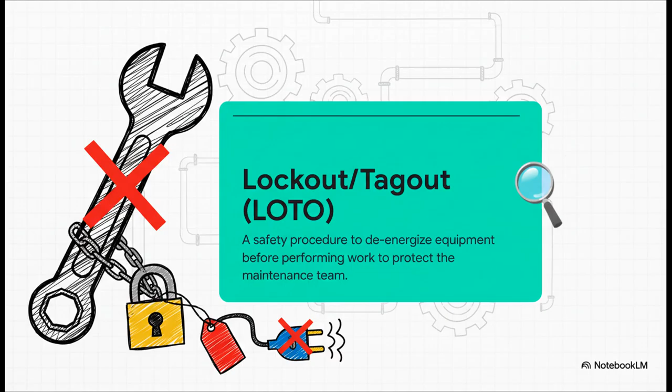Okay, first up, let's explore what you could call the plant's heart and its circulatory system. I'm talking about the electrical and mechanical gear that provides the power and the pulse for the entire operation. Before a single tool even gets picked up, safety is everything, period. This procedure right here, Lockout/Tagout, or LOTO for short, is completely non-negotiable. It's a physical lock that makes absolutely sure a machine has zero chance of turning on while someone is working on it. It's such a simple step, but it saves lives, and it is always step one.

Now, get this. Here's a fact that sounds totally backwards. The #1 reason for bearing failure isn't too little lubrication, it's actually too much. That's right. If you pump in too much grease, you can blow out the seals and cause a ton of damage. It's a perfect example of how this kind of maintenance is a game of precision, more like surgery than just hammering on things.

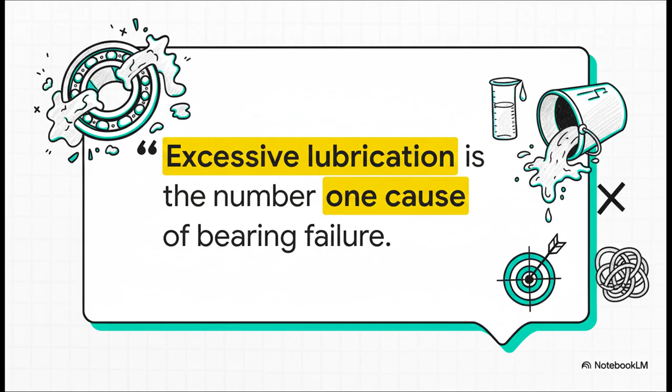Think of these checks as a regular physical for the plant's heart. You're making sure it can breathe by keeping the vents clear so it doesn't overheat. You're checking its posture, making sure the alignment and belt tension are just right to reduce stress. And just like a doctor with a stethoscope, you're listening for any weird noises and watching that amp draw because those are the very first signs that something might be going wrong.

So, those motors we just talked about, they're powering the real workhorses of the plant, the pumps. These things are moving unbelievable amounts of liquid, 24/7, with no breaks. So how on earth do you keep them from failing? Well, more often than not, the answer comes down to one tiny little component, the seal.

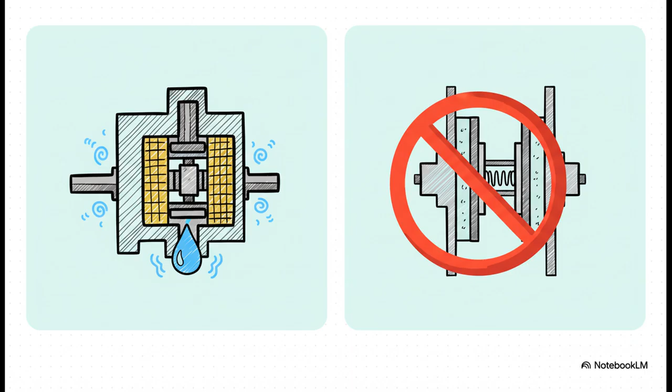All right, so you've got two main kinds of pump seals, and this is where it gets pretty interesting, because they have completely opposite rules. On the left, you've got the stuffing box, which is actually designed to leak. That little drip is critical for keeping it cool. But the mechanical seal on the right, totally different story. It should be bone dry. If you see a single drop, you know that seal has already failed. You absolutely have to know which one you're looking at.

So for those stuffing boxes, what's the magic number? Well, there it is, 1 to 2 drips per second. Any slower, and that pump is going to overheat. Any faster, and you're just wasting water and wearing things out. It's such a tiny detail, but getting it right has a huge impact on keeping that pump running for years and years.

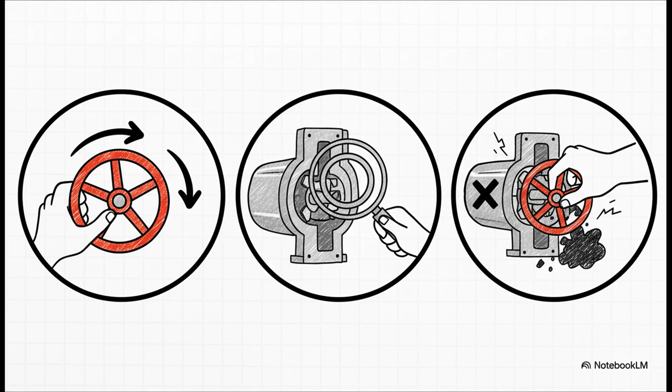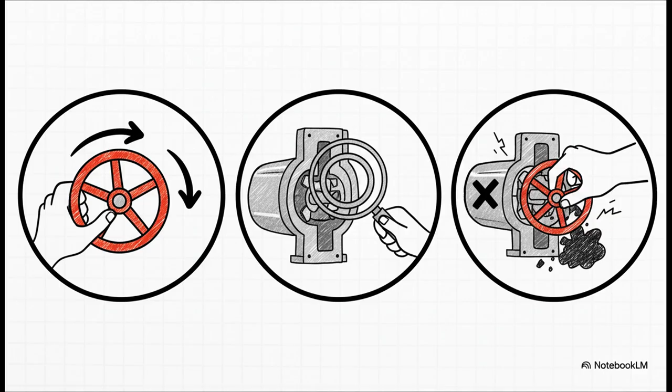And hey, it's not all about the seals. There are other simple habits that can prevent massive headaches later on. For instance, exercising a valve, which just means opening and closing it every so often, stops it from seizing up. And if a pump sits idle for too long, the sludge inside can literally harden like concrete. A simple hand turn of the impeller every now and then prevents a super costly and difficult repair down the road.

Okay, we've moved the water, now it's time to actually treat it. This brings us to what you could call the plant's pharmacy, its chemical systems. And in here, precision is absolutely everything, both for the treatment to work right and for the safety of the crew.

When you're working with these kinds of chemicals, your absolute last line of defense is the emergency shower and eyewash station. And as you can see from this checklist, it has to be tested every single week, without fail. The water can't be freezing, it can't be scalding, it has to be just right, otherwise you risk making a bad situation worse. And look at that last one, it must be able to run for a full 15 minutes. We're about to see why that number is so critical.

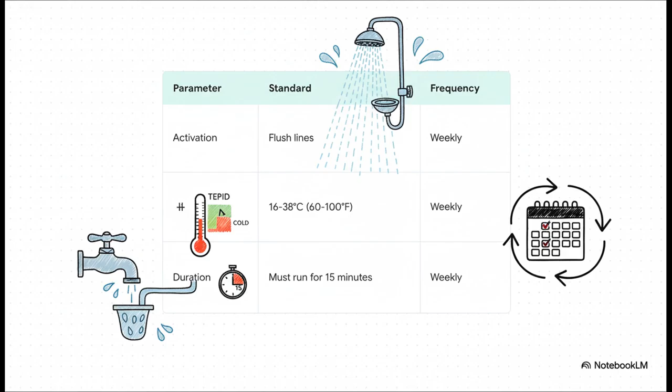Let's just focus on this number for a second, 15. Why 15 minutes? Because that's the minimum time medical experts say you need to properly flush dangerous chemicals out of your eyes. Anything less than that, and you're gambling with someone's eyesight. A station that can't hold up for 15 minutes isn't just a broken piece of equipment, it's a complete failure of the safety net.

So, that was the emergency stuff, but proactive safety is also about daily habits. This is super simple, but absolutely critical. The moment a chemical transfer is done, the line gets flushed with water. Right away. This immediate little step prevents crystals from forming, which can clog up the lines and bring the whole system to a grinding halt.

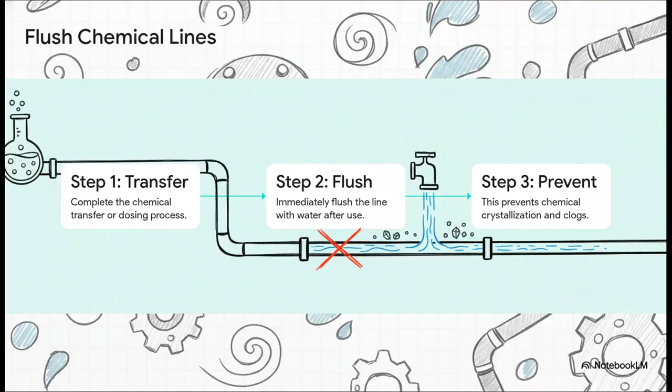You know, when you boil it all down, maintaining the chemical systems really comes down to these two habits. On one side, you're constantly calibrating for accuracy. On the other, you have a zero-tolerance policy for leaks. I mean zero. Because even a tiny, harmless-looking drip can literally eat through concrete and steel over time, creating a massive hazard.

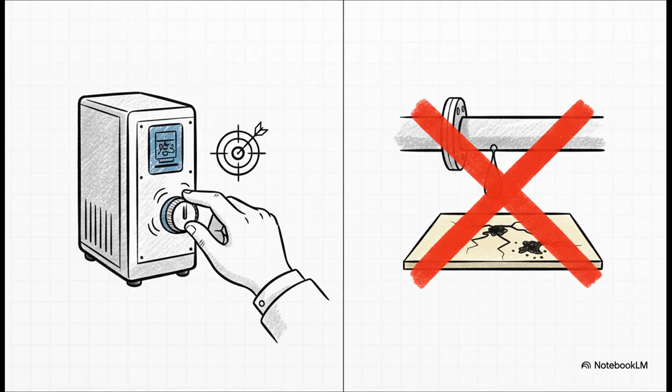Now let's move to the biological core of the plant. You could think of these as the living engines that do the real heavy lifting of the treatment. We're talking about the aeration and digestion systems, and they need just the right environment and fuel to do their job.

So in the aeration tanks, the whole goal is to get oxygen to the helpful bacteria. Seriously, just picture a giant aquarium, but for an entire city. That means keeping the air filters clean, just like on your vacuum cleaner. It also means doing something called an air bump, where you blast high-pressure air through the system to shake off all the gunk that builds up. It's all about making sure the good bacteria have plenty of air to breathe.

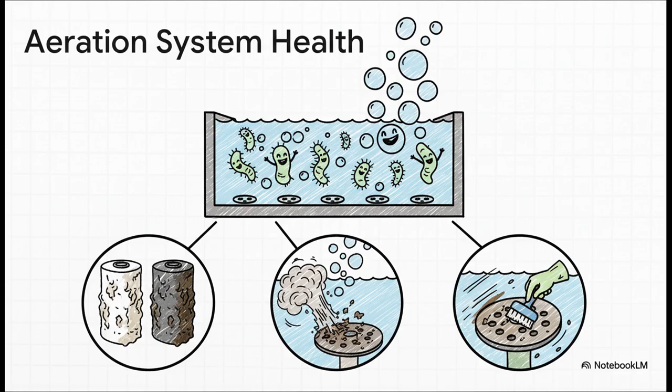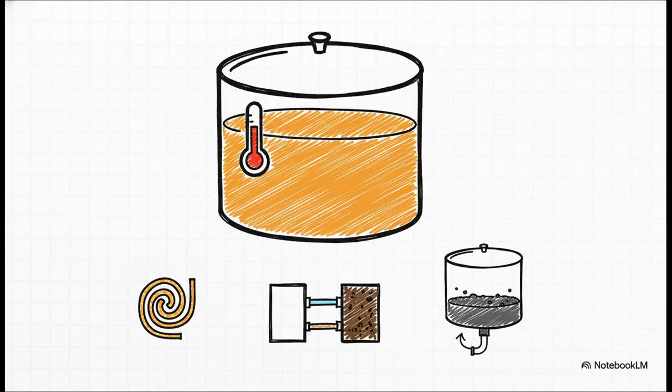Now for the anaerobic process, that's the one that works without oxygen, it's all about keeping things in a stable, warm environment. But over time, grit and scum start to build up at the bottom, and that's a huge problem. It literally reduces the digester's volume, which means it can't process as much waste. So cleaning it out every so often is absolutely essential to keep it running efficiently.

And this leads me to a really critical safety warning. The gas that these digesters produce is highly flammable. The safety equipment on these lines, things like flame arresters and relief valves, are pretty much the only things preventing a catastrophic explosion. They are there for a very, very good reason, and they must never be bypassed.

So we've looked at the plant's heart, its nervous system, and its engine. Let's kind of zoom out now and pull it all together. Let's talk about the philosophy, the mindset, that governs everything we've just seen. And this right here, this is the key takeaway.

Proactive maintenance is not about just mindlessly ticking off boxes on a list. It's a mindset. It's a discipline of being constantly vigilant, of training your eyes and your ears to see the small signs of trouble before they snowball into huge failures. It's about understanding that every single part affects the whole system.

And in the end, that's what it all comes down to. This discipline is what separates a reliable public utility that protects the community from a costly public liability that's just waiting to cause a disaster. All that quiet, consistent work we've just talked about, that's what guarantees our safety and the health of our environment.

It really makes you think, doesn't it? This is just one of these vast, hidden systems that make our modern lives possible. So maybe the next time you turn on a tap or flush a toilet, just take a second. Think about that invisible network and the dedicated people working around the clock to keep your world running.